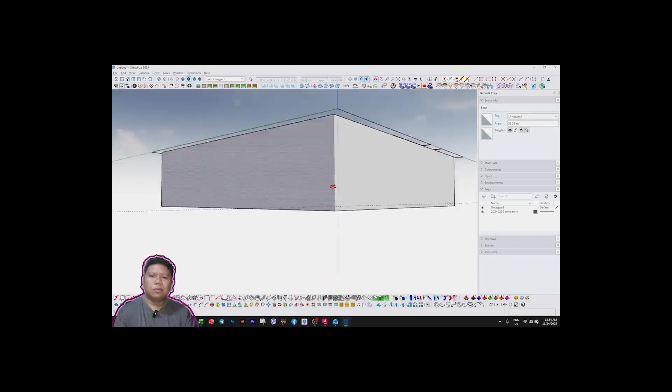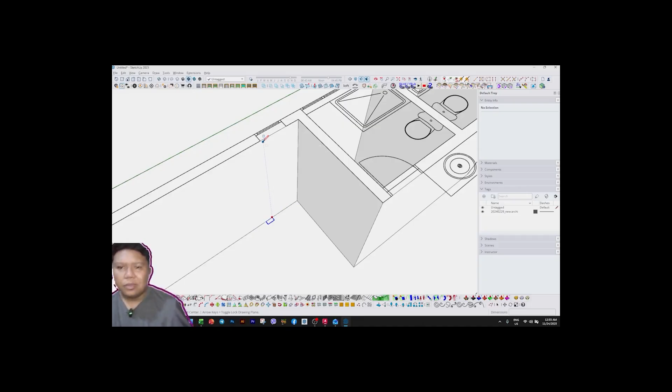This is easy. Again, with inference locking, click shift. For example, this is the technique: I'm gonna put my rectangle on the edge, then click hold shift. What happens is it gets stuck on that particular plane, and I can move my mouse around. What's nice is I just click on the line where the edge of the window is. See? So I can make a hole. The problem is I don't know how tall the hole should be.

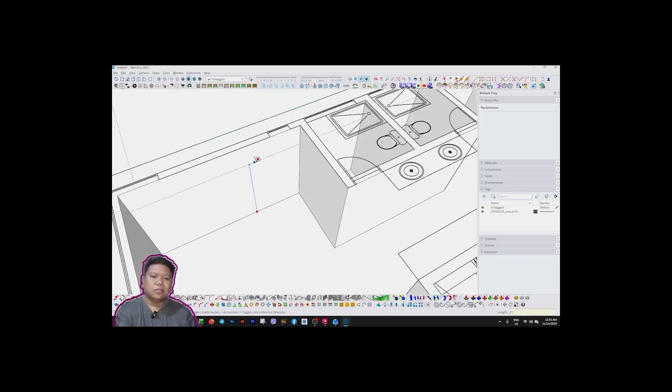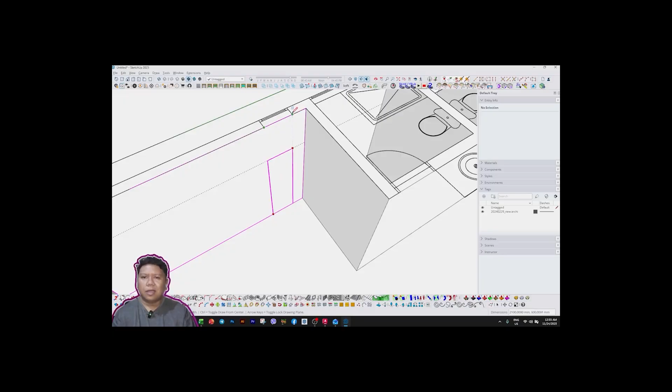So it's better to do one reference point. The height of our window and our door is 2,100. So let's repeat: inference locking, rectangle, stay on this plane. Click, hold shift, move my mouse to this point, then click. And then this is the other one, shift again to lock, inference to the corner, and voila - we have a hole now. So since we have the height, inference locking again.

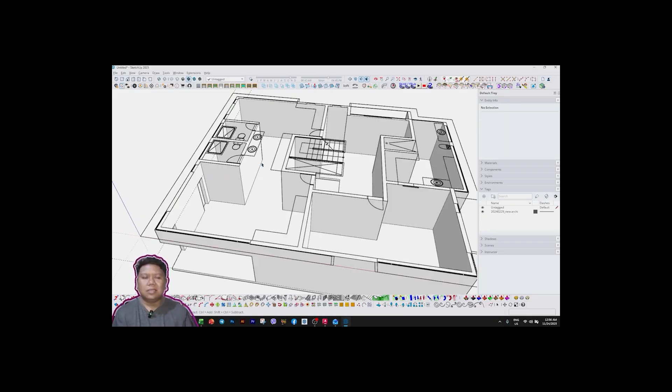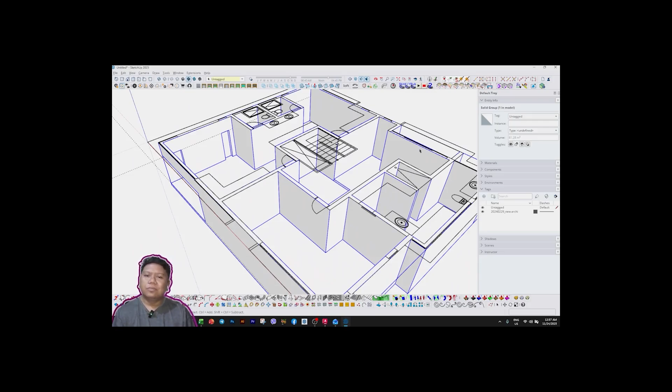So this is one technique I usually use when massing. This is what I call massing the walls and the floor. It's very easy and less time consuming compared to using AutoCAD lines. Another advantage of this technique is that it creates volume - basically this mass is a solid.

It's good practice that when you draw models in SketchUp, it has to be a solid, it has to have volume. One technique to find that out: select all the parts. Triple click to select all connected parts, then right click, make group. Let's repeat: triple click, then right click, and make group.

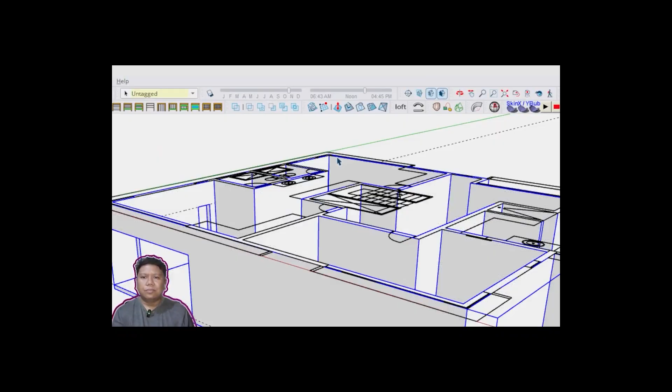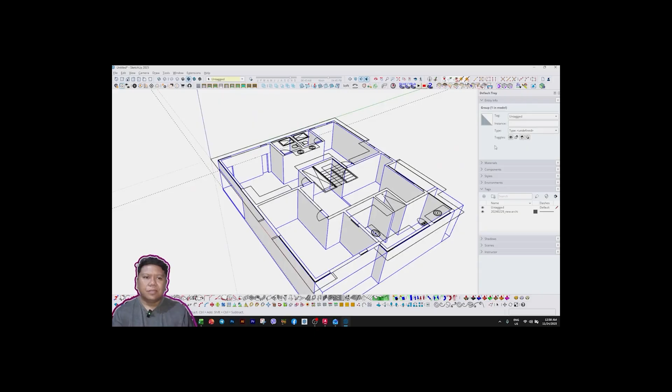Once you make it a group, it should have volume. It won't have volume if the model is broken. As you can see here, I removed the floor, or worse, I removed a plane - it's no longer a solid. There are ways to check how to fix that, but that's a video for another time.

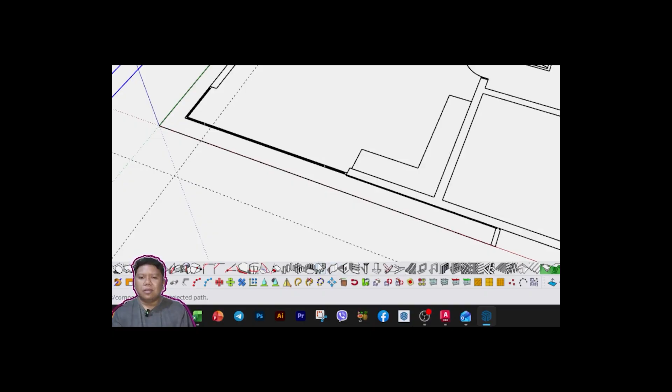I'm gonna teach another technique on how to do the massing of the floor plan using the 1001bit plugin. So we have here the tool to build different types of walls. When you click this, it asks what design of wall you want - there are three types.

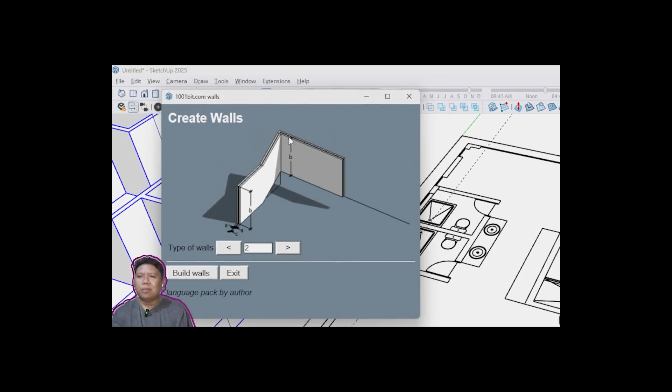This is the most basic, number 1. Number 2 has a panel in the middle. And number 3 looks like a drywall or a double wall. Not bad. For now, let's use the basic one - it's up to you to explore the others. Okay, we're gonna build a wall.

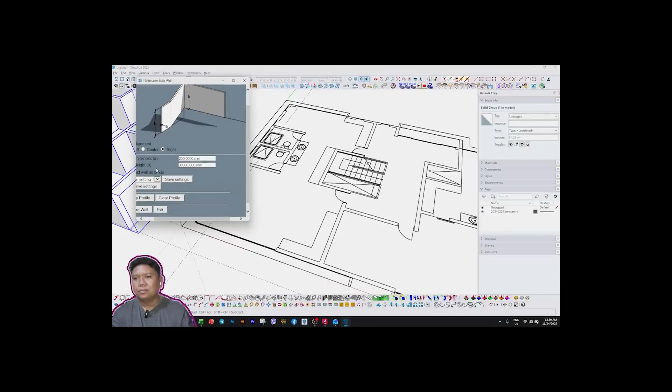So how do you make it? Make sure it has thickness - 200 is the thickness here, and the height I set to 3,000, which is our correct measurement. Then for wall alignment, there's left, center, right - I suggest using left, not center since we have no guide for center. So it's either left or right. Create a wall, that's it. So we're gonna use this.

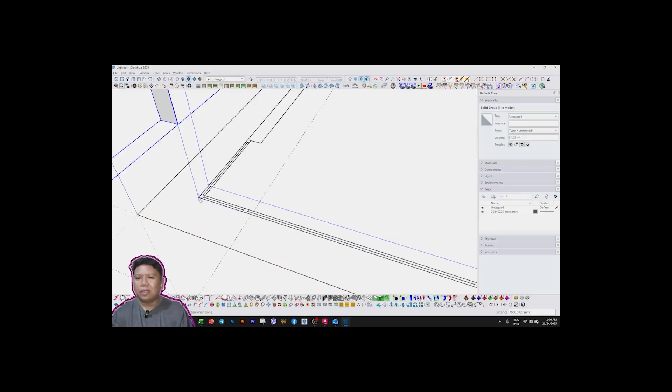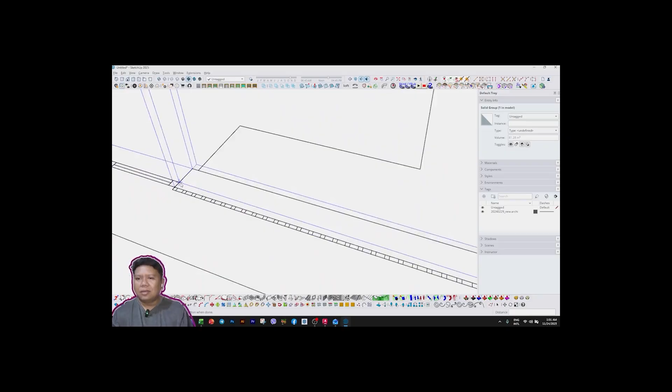When you notice the direction is wrong, you can simply go the other way. This is a convenient way of creating walls in SketchUp - we're using a plugin this time instead of doing it manually. What I'm doing here is using the AutoCAD file as a reference for the connection points. When you close it, double click or single click it, and you can see it now has a wall with volume - meaning it's a solid, which is something good.

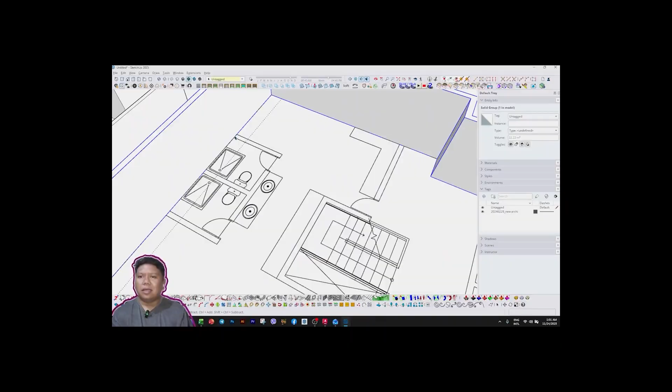Sir, what about the middle parts? You have to redo the process - that's how it is, repeat it, create a wall.

Okay, so that's my direction, so I can simply escape and redo the lines. Wait, I made a wrong click.

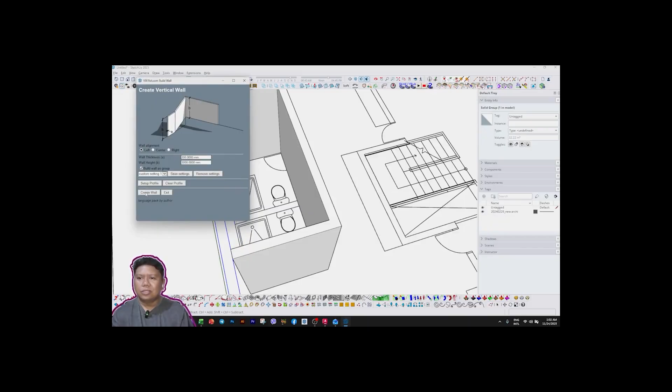So build walls, create wall. It has quite a lot of clicks, but not so bad. Double click.

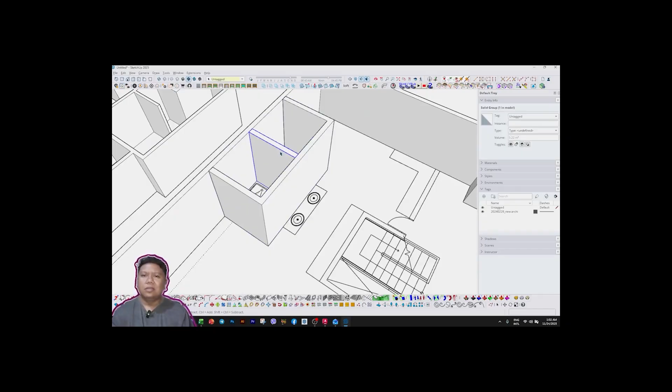Okay, this time we're gonna use solid tools, which is why I recommend that when you do models, it has volume so that you can also use this solid tool.

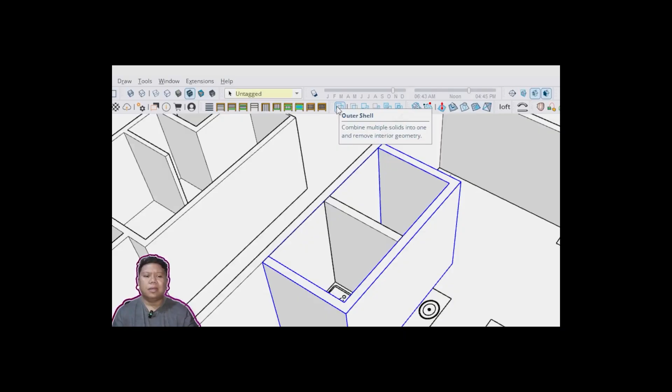Okay, what is this, sir, the solid tool? This is a plugin that is actually included in SketchUp once you've used it. Once you install it, it's always there.

Okay, so what does it do, sir? You can simply select all the solids - see, it has volume - and then click outer shell. And what it does is it combines solids together into one mass.

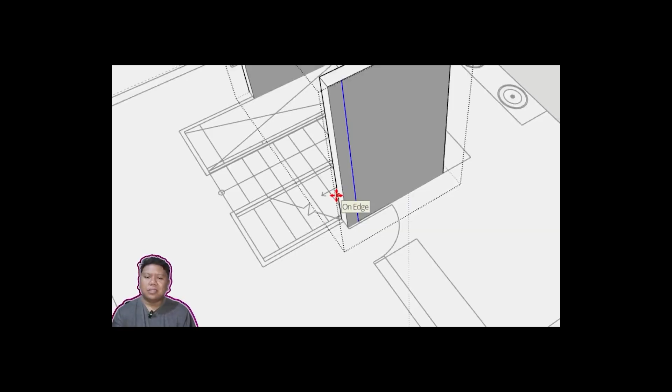I'm gonna move this line sideways, and then inference lock it to a certain axis. So this is red axis. And then I'm gonna move my mouse here so it stops there, and then push this towards this.

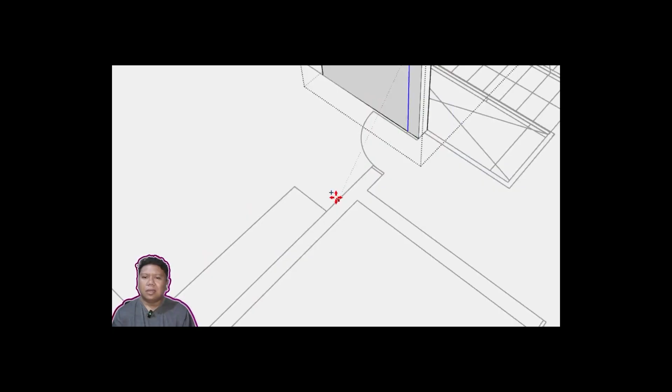Okay, I'm gonna do the same here. I'm gonna move, control this so it duplicates. Then I'm gonna move my mouse here so that's the ending, and then push.

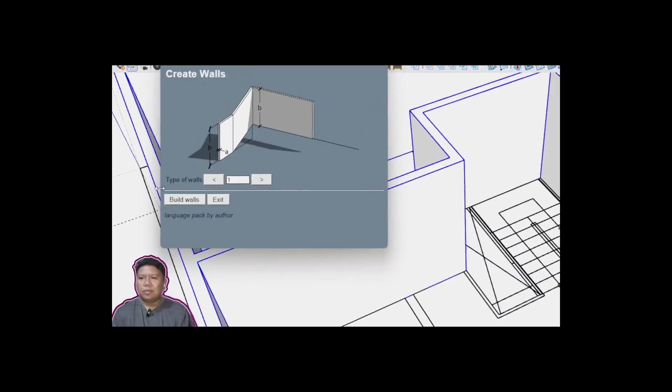Okay, again, select both solids and click outer shell. After this, you'll notice you already have walls. So now we have one big mass total.

Now, sir, how about the openings? Okay, next to the wall is creating openings. So when you click this, it goes there. It has a single leaf door opening option - it's set to 900, but you can easily just type the width. So in this case, it's 800 by 2100.

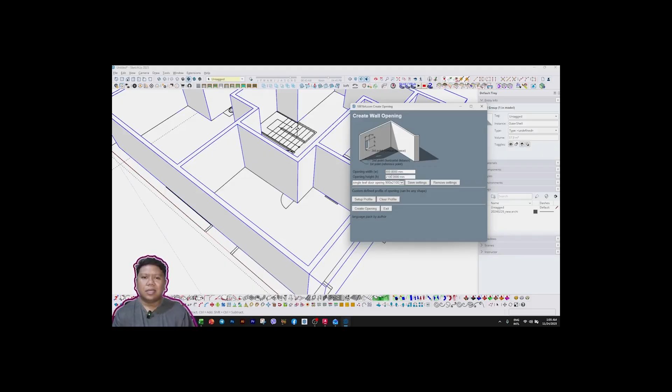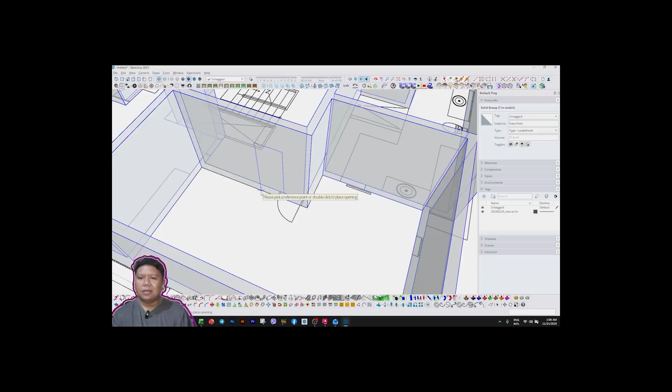Okay, look at this, this is a solid, and it has a lot of clicks. So the first click should be on the bottom part. It's better if you use X-ray mode for this. So, I'm gonna click it here in the corner. Next click is where it will start, so I click here. And the next click is asking for the height, so I click it here. And voila, you'll notice there's now a hole.

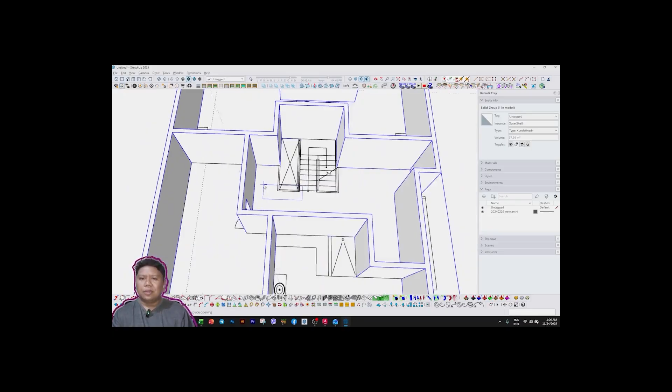Okay, not bad, right? Again, one more - click on this corner, and click on here, then up, click here. Okay, be careful, sometimes it malfunctions, as you can see here.

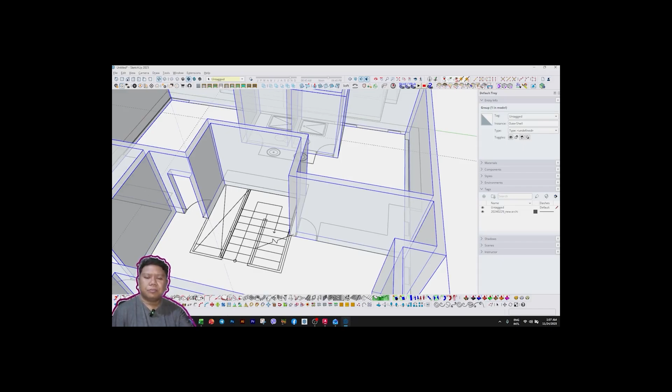Or, guys, you can also combine techniques. So you can use the build wall first, and then afterwards, you can also do our inference locking technique. So, click here.

Another technique of mine. Let me just double check. Something's wrong with this - it's the plane, it's not aligned. Few moments later, anyways... is it still? Okay, it's broken now.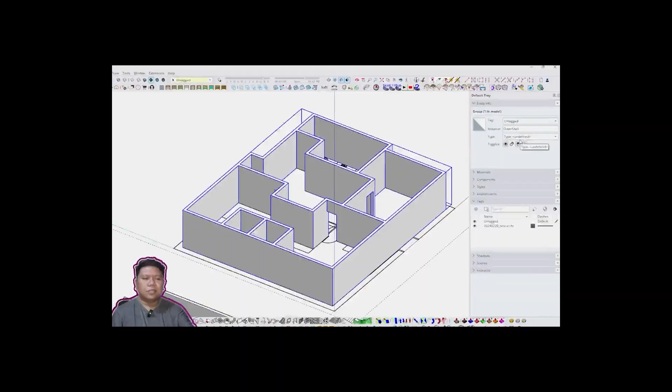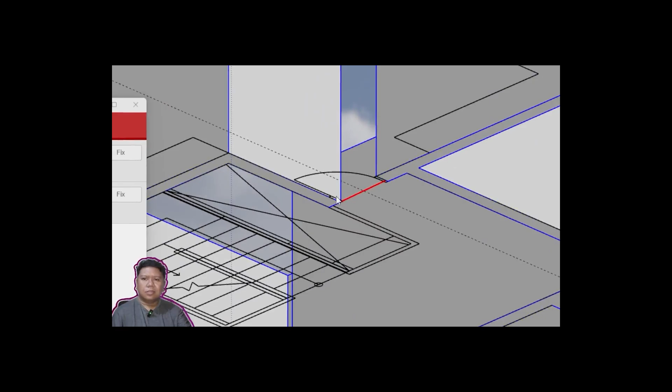As you can see here, there's something wrong with this. Don't worry, we have a plugin for this one, called Solid Inspector. So basically, just select the object and click solid, and it will tell you where the stray edges or the problem is. It's there - you can try to click fix all, and there we go, it's whole again.

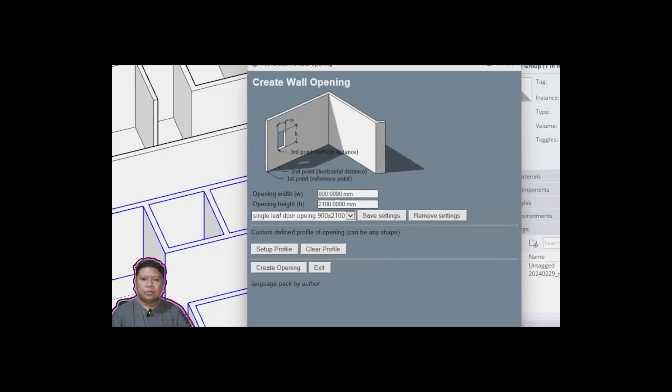Anyways, you can also do the same with windows, if you know the height of the windows, so it's up to you guys. So, 2.1, let's say 1.2. Let's say here - click, click, click. Okay, so you get the results you need on this one, not bad right? So it can be easy.

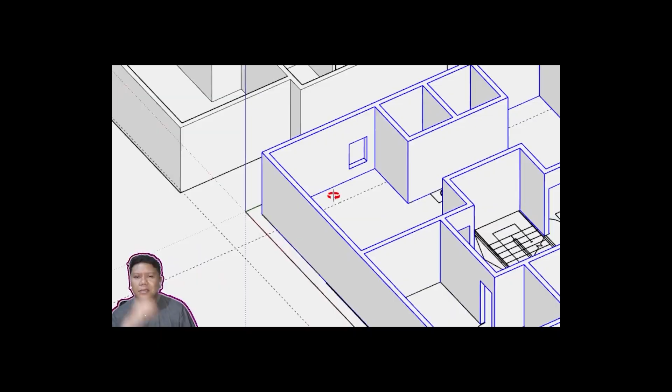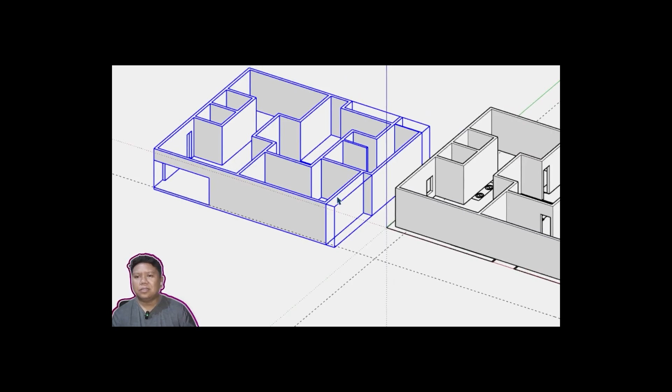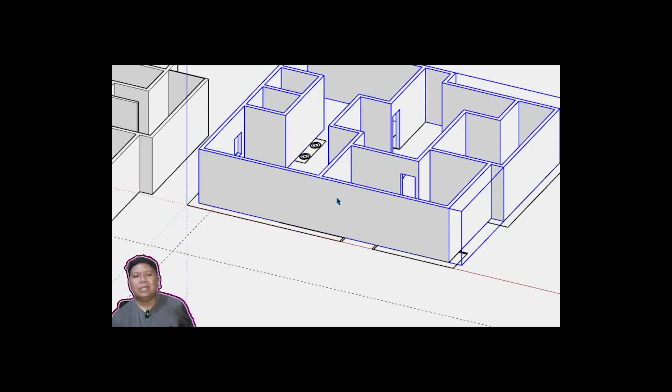It depends on you, guys. What's nice about SketchUp is there's no one way of doing a certain thing that you want to draw. For example, this is just a massing - there's different ways to do the massing. This one here is what I usually do, and this one here has plugins helping it, so it depends on you guys. You can mix styles. What matters is you finish the work on time - it's each person's own technique to finish fast. So the more technique you can think of, the better.

Alright, so well, I guess that's it for now. I hope you learned something.